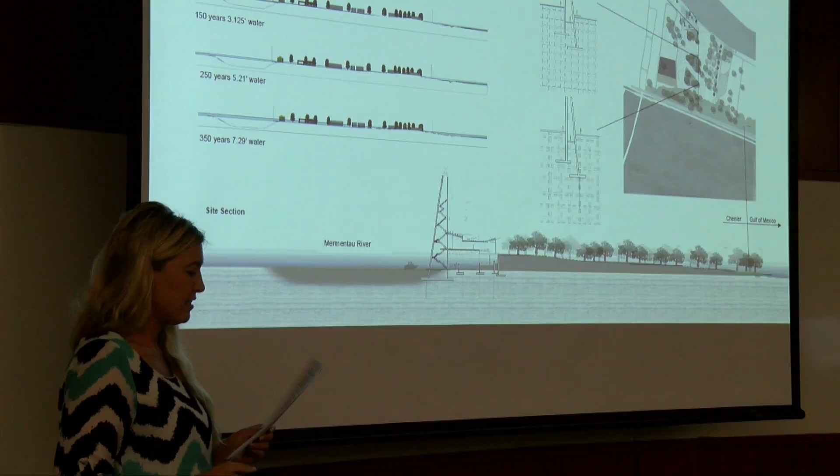This master's thesis explores the changing landscape of the Chenier Plain as a physical landscape and a social landscape, and designs an architecture that exists within the changes. The site of the design was in Grand Chenier, Louisiana. The project is a 14,000 square foot boathouse on the Mermentau River and a memorial garden that connects the Chenier to the building. The program of the indoor space is a coffee shop and event space, and the outdoor space is for community gatherings and festivals.

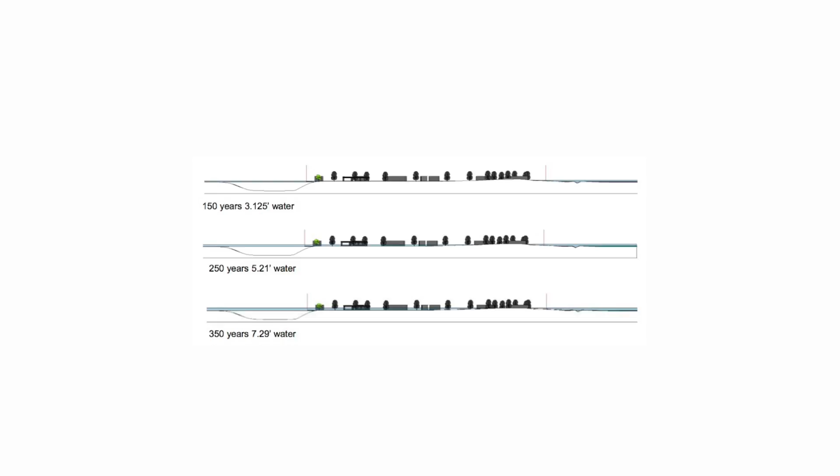The design was rooted in the idea of landmarking. The design looked at hurricane resilient strategies and planning strategies that considered 350 years of sea level rise projections. The design research process used a framework of geodesign to plan the built and natural environment from conceptualization through analysis, stakeholder input, and simulation. A transdisciplinary thesis committee including architects, sociologists, and coastal scientists informed the development of the work.

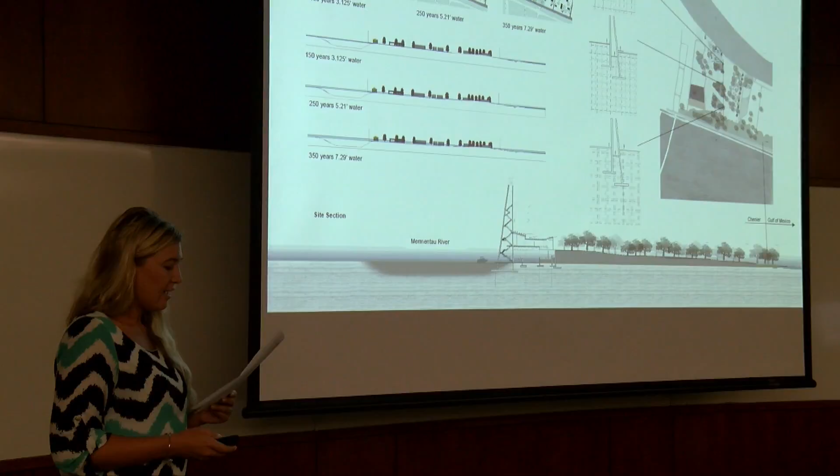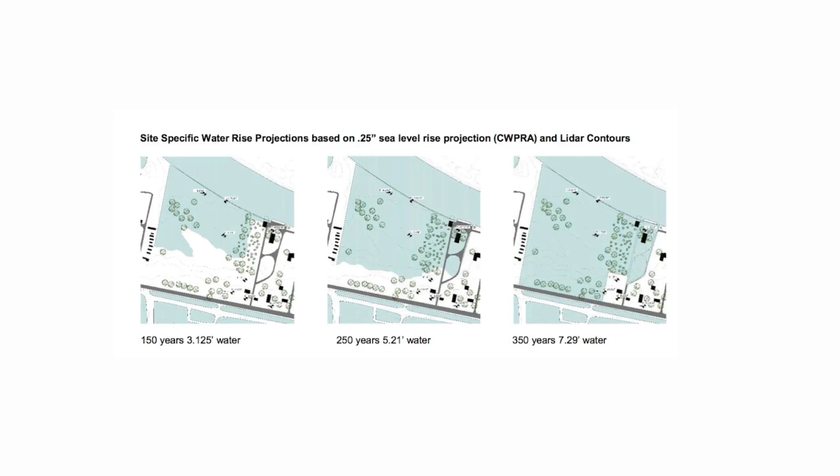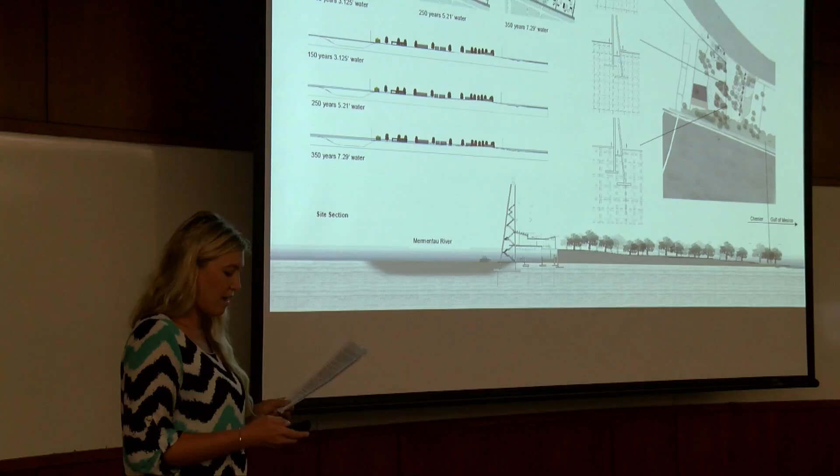To understand the changing physical landscape, ArcGIS maps of the waterways, LiDAR imagery, topography maps, and aerial imagery were analyzed to understand the site conditions. The topography of the land was analyzed and projected flooding diagrams were created based on a .25 inches a year projection and LiDAR contours. Three-dimensional models of the site were constructed out of clay to understand the temporal flooding of the site due to sea level rise, and two-dimensional topographical studies in plan and section were conducted to analyze flooding over time. Historic hurricane flood levels were researched and used in the design of the project.

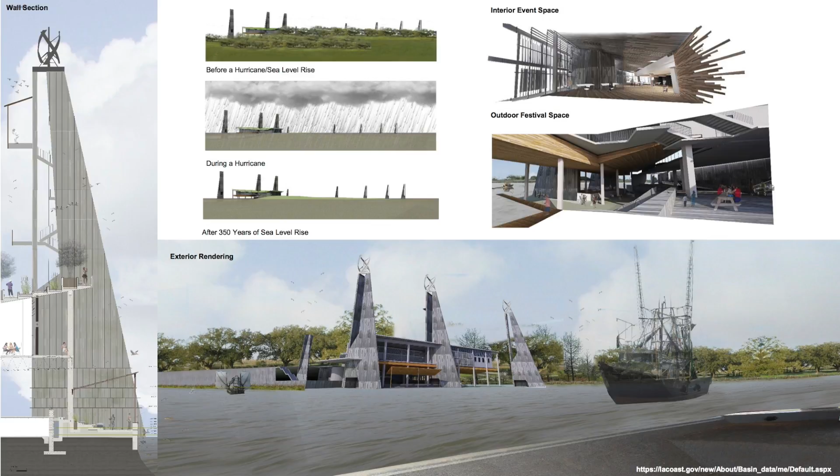To understand the changing social landscape, images of the built environment were taken, cataloged, and successful architectural syntax was diagrammed and analyzed. Being from Grand Chenier, community events were attended and the culture was observed. An anonymous sociological survey was created and distributed using my Facebook account. The data was analyzed and the emotional response that the survey generated was explored in two-dimensional drawings, sketches, and models.

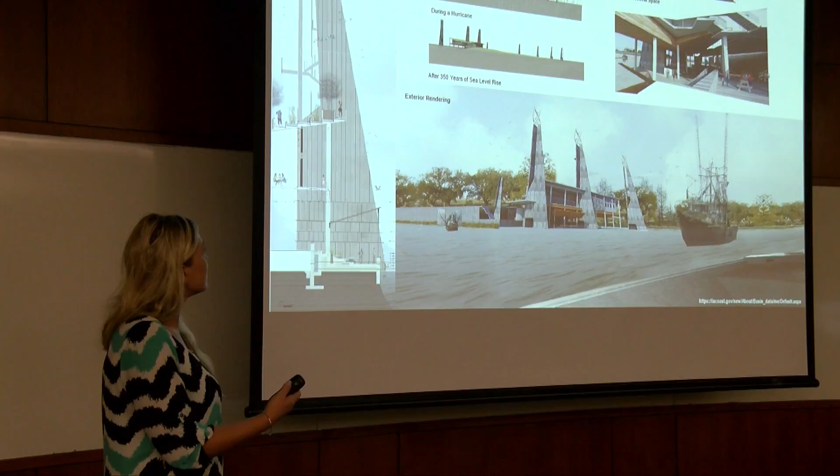The main driving force for this thesis was to create a home for people whenever there is no home. So in the future, whenever the water rises and the landscape is gone, how do we mark the place for people to exist? And the details of the hurricane storms and the projected flooding levels were embedded within the architecture so that the projection model was seen in the architecture.